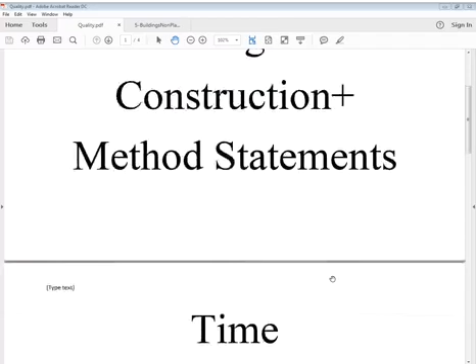25th March 2021, Thursday. Talking to you again regarding professional issues, engineering issues, construction issues, titled civil field engineering, designs, construction, methods, contracts, etc., and quality on top of that, which has very important points to be discussed and taken care of. This includes quality, designs, construction, method statements, time, cost, risks, reliability, analysis, synthesis, thinking, contemplation, application. Very important points to be raised and conferred with, and important issues we have to consider in our approach.

And also buildings which are non-plant buildings, meaning not relevant to blast loading or blast issues, or in chemical areas which are not located in those areas but in administrative areas, storing areas, off-sites - like those non-plant buildings. I talked about this last time, and various statements are included in that.

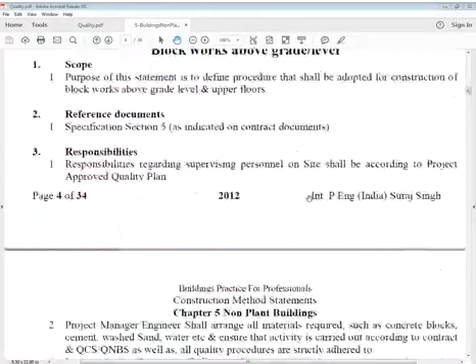Blinding concrete, concrete - we talked about this. Then we talked of reinforcement: cutting, bending, binding, and placing. And we talked of block work above grade level. And then we talked of...

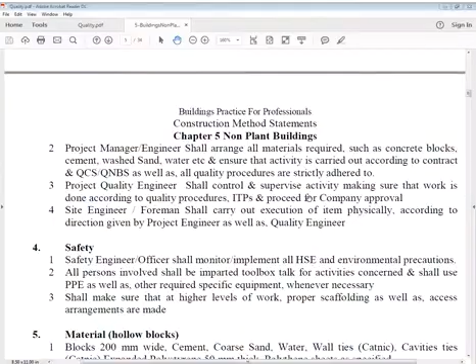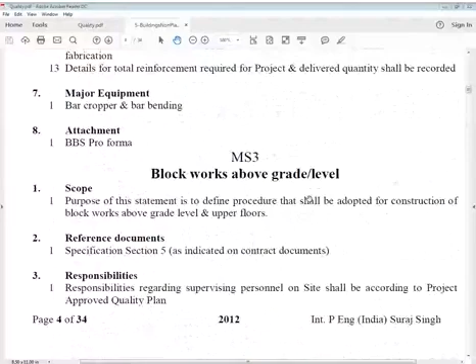Now I'm interested in talking about - let us consider block work first. It's also very important, though it's a very ordinary item, but it's also responsible. We'll take this into our consideration. Let us see this very normal work, which we call very normal, but very, very important work: block works above grade level.

Purpose of this statement is to define the procedure that shall be adopted for construction of block works above ground level and upper floors. What we have to consider - all these points of quality, designs, construction - all that we have to consider in this.

Now, because it is block work, maybe it's not considered structural work. Indeed, it's not structural work if these blocks are not load bearing. Generally blocks are used hollow, and there are certain strengths these blocks have, which we'll discuss. But the objective of this statement is to define the procedure that should be adopted for construction of block works above ground level or grade level and upper floors.

Location is upper floors - that can be ground floor, first floor, second floor, or whatever it is. And the reference document is specification section 5, whatever is in our contract, let us say. It doesn't mean for you it is section 5.

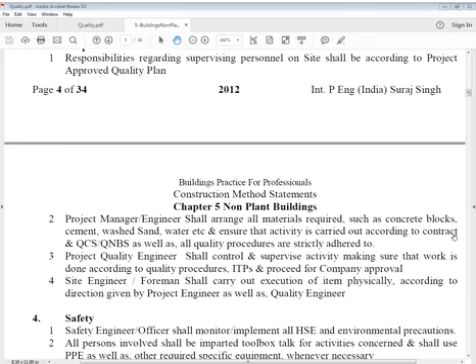Now responsibilities regarding supervision: personnel on site shall work according to the project approved quality plan. Every project must have some quality plan, where responsibilities are defined, job description is defined, accountability is defined, technical accountability, where the project manager or leader or engineer has to arrange all materials required.

Don't just go by what I have written, because I'm just reading superficially and explaining. Project leaders arrange all materials required, such as concrete blocks, cement, washed sand, water, etc., and ensure that activity is carried out according to contract provisions or national standards or national specifications.

Because I use this writing for Qatar, it's given for those times as Qatar National Building Specifications, or QCS, Qatar Construction Specifications. QCS and QNBS is just for the assessment - this sample is not for you specifically.

As well as all quality procedures must be strictly adhered to. Now, project quality personnel or engineer shall control and supervise the activity, making sure that work is done according to quality procedures - ITPs, which means inspection and test plans, and proceed for company approval.

Company means the organization - that is the client or the owner of the project, or whatever company it is for whom we are working. And the site man, site person, site agent or site engineer - who I should say is the site in charge - and delegates, or you may say deputies rather than delegates, shall carry out execution or prosecution of the item physically according to direction given by the project leader and quality engineer.

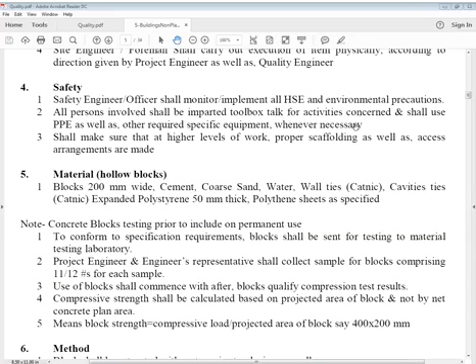When I say blocks, this means hollow blocks, concrete blocks. To conform to specification requirements, blocks shall be sent for testing to a material testing laboratory. How many blocks do you have to send? Generally 11 or 12 is standard, but it's up to you, not less than that. The project representative shall collect a sample of blocks comprising 12 numbers for each sample.

Use of blocks shall commence only after the blocks qualify in compression test results. We will test the block in a compression machine and find the results. The compressive strength has to be calculated based on the projected area of the block, not the net concrete plan area. This is a very important point.

When I'm talking about a hollow block, it is not 100% concreted surface. There are voids, two cavities in each block, which account for about 50%. There's a certain thickness to the walls of the cavity, so you can say there are 5 walls in that block: one in the middle, one on each end, and longitudinally, structure-wise, 2 walls.

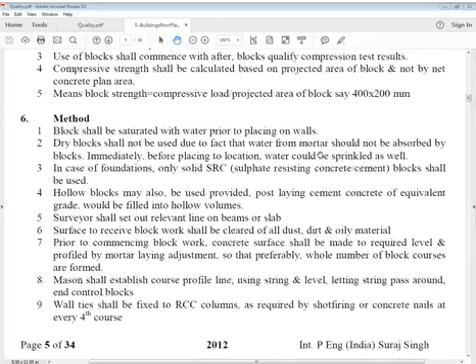Now, what is the method, let us say? I explained so far the fundamentals of block work. Now, what's the method? It's an important point.

Blocks should be saturated with water prior to placing on walls. Dry blocks shall not be used, due to the fact that water from the mortar must not be absorbed by the blocks. Immediately before placing to location, water could be sprinkled as well. Do not use dry blocks. You have to water it, saturate it, so that the block does not absorb water from the mortar. Immediately before placing to location, water should be sprinkled on the block as well as the location.

In case of foundations, only solid SRC (sulfate resisting concrete) cement blocks shall be used. Do not use OPC blocks in foundations. You have to use only SRC and solid blocks, because in foundations solid blocks are used, or you have to fill all cavities either by solid blocks or fill the cavities. In case of solid blocks, there's a handling problem, but in foundations that's used.

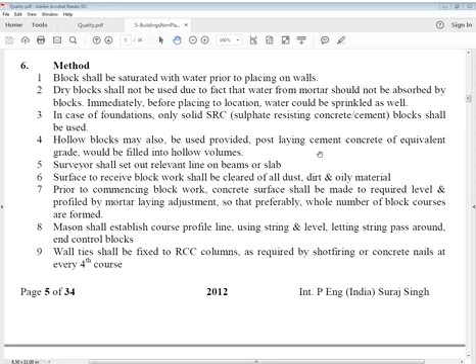The mason, or block layer, shall establish the course profile line. Course means a layer of block. The mason shall establish the course profile line using string and level. String or thread, also called line door.

The level lets the string pass around and control the blocks. The blocks are placed and the string is tied for the purpose of profile construction, letting the string pass around the blocks.

Wall ties shall be fixed to RCC columns as required, by shot firing or concrete nails, at every fourth course. Concrete nails are used in case you don't have a shot firing gun, but the best method is a shot firing gun, which uses steel bullets. So wall ties shall be fixed to RCC columns at every fourth course of block, shot fired using bullets into the concrete walls or column.

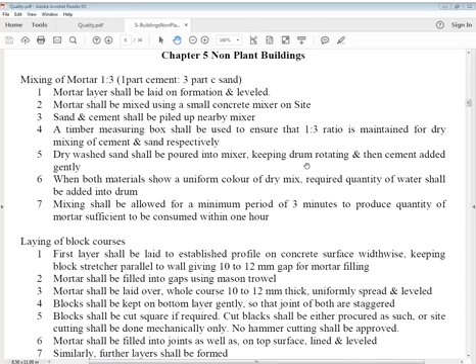Laying of block courses. First layer shall be laid to establish the profile on the concrete surface widthwise. First layer, we are going to use it first on ground floor, keeping the block stretcher parallel to the wall.

Giving a 10 to 12 mm gap for mortar filling. Mortar shall be filled into gaps using a mason trowel, and the whole course of mortar shall be laid over the whole course, meaning no space is left.

10 to 12 mm thick, uniformly spread and leveled. Blocks shall be kept gently on the bottom layer so that joints of both are staggered.

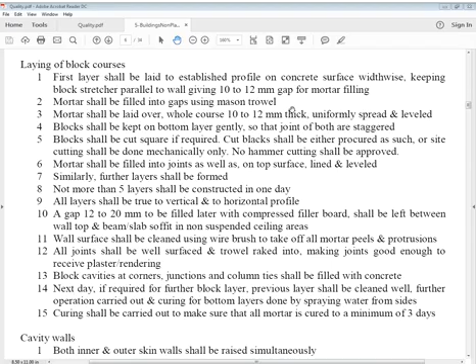Mortar shall be filled into joints as well as on top surface, lined and level. It should be filled completely without leaving any void. Similarly, further layers shall be formed.

Not more than 5 layers shall be constructed in one day, meaning no more than 1 meter, since one layer is 200 mm. Not more than 5 layers to be constructed in one day.

All layers to be true to vertical and horizontal profile. All layers shall be truly horizontal and truly vertical, within tolerances of course.

A gap of 12 to 20 mm, to be filled later with compressed filler board, shall be left between the wall top and the beam soffit or slab soffit in non-suspended ceiling areas. Your block should not touch the surface of the RCC at top. The top of the wall should be free of touch from the concrete beam soffit or slab soffit, and that portion should be filled with compressed filler.

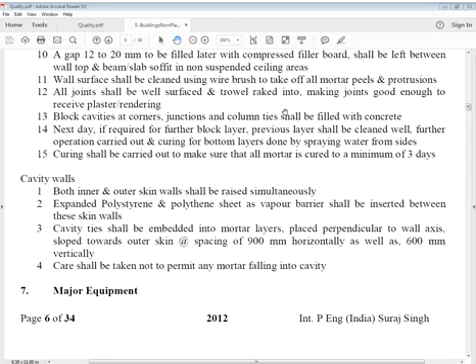Now let's talk about cavity walls.

Cavity walls: both inner and outer skin walls shall be raised simultaneously. Not that you raise the external half and internal quarter, or full half. No, not like that, because we have to fill in cavity ties. Both inner and outer skin walls shall be raised simultaneously.

Expanded polystyrene and polythene sheet as vapor barrier shall be inserted between these skin walls.

Cavity ties shall be embedded into mortar layers, placed perpendicular to the wall axis, sloped towards the outer skin, at a spacing of 900mm horizontally as well as 600mm vertically. So every third layer has cavity ties, and the distance between them is 900mm, you can say 2.5 blocks.

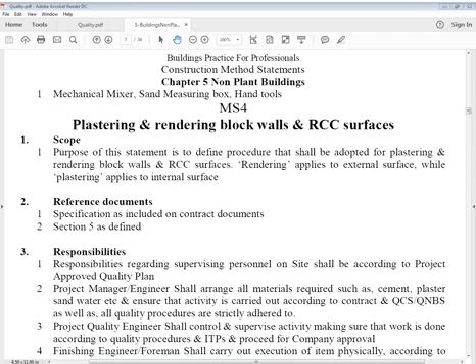This was about concrete block, and we have to understand that we talked of quality here - quality of material, quality of safety, quality of course - safety has not been discussed in this but we'll discuss it, and testing. We discussed reliability, and quality is mainly what's discussed in this case.

So what we discuss is, we have to understand that. Then we can say safety is also given here. I think we covered safety - yes, this was discussed about HSE ergonomics, so we discussed that one.

Only point I have to discuss, which we missed, is that the wall is not done on one floor only - you just keep certain drums, reversed, and put on them some timber planks, so people stand on them and work at not more than 2 meters height, because generally the room is around 3 meters high. So we keep this 1.5 meters high, and the person is also about 1.5 meters high, so generally it reaches the top. In case scaffolding is required, mason's scaffolding or steel pipe scaffolding can be installed there.

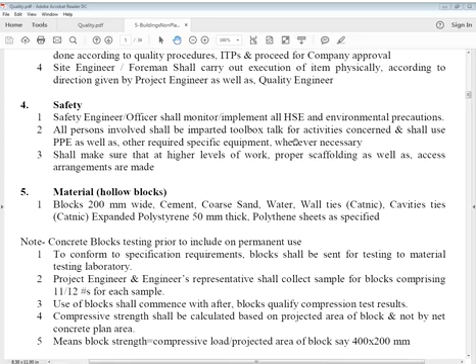I think this doesn't carry much risk - even if a person falls from 1 meter height, it's not going to be fatal, and this is ordinary safety you can say. Since you work within the room, heat is not an issue, though wind could be an issue if this is not done. Then hygiene and housekeeping are important issues, so those must be taken care of. And mortar should not go into eyes, so you may use safety glasses, and of course other PPE are there.

Now we talk of plastering and rendering block walls and RCC surfaces - plastering and rendering.

You may ask, what is plastering and what is rendering? What's the difference? Everybody has a right to ask. Plastering is a general term which is used, applied to internal plaster - simple. And when plaster is exposed to external agencies like weather, sun, rain, that's called rendering.

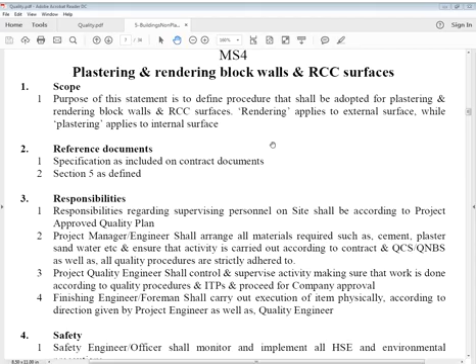Documents are specifications and contract documents, and we know that. Now, responsibilities, as we said before, regarding supervising personnel on site shall be according to the project approved quality plan, which every site must get. If not, then you define yourself who's responsible for what.

Project leaders shall arrange all material required, such as cement, plaster, sand, water, etc., and ensure the activity is carried out according to contract and national as well as other applicable specifications. All quality procedures must be strictly adhered to - quality is important here. Project quality in charge shall control and supervise the activity, making sure work is done according to quality procedures and inspection and test plans, and proceed for company approval.

Finishing engineer, foreman - I'm using the specific term finishing items because the structural engineer is not here. Finishing engineers, or a person experienced in finishing items, would carry out execution of item physically according to direction given by project leader as well as quality leaders.

Now safety. Safety engineer or safety in-charge monitors and implements all HSE - health, safety, environment, ergonomics - precautions. All persons and crew involved shall be imparted toolbox talks for activities concerned and use personal protective equipment as well as other required specific equipment whenever necessary.

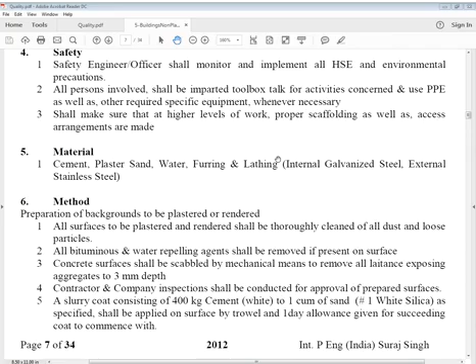but I think here we don't do it. Well, I won't say it can't be done - it should be done in the interest of the job. Then, what's the method now? Method.

Preparation of backgrounds to be plastered or rendered. All surfaces to be plastered or rendered must be thoroughly cleaned of all dust and loose particles, probably using a hardware brush.

All bituminous and water repelling agents - any coal tar, bituminous, or water repelling agents - should be removed if present on the surface. Okay, this is very much clear.

So concrete surfaces would be scabbled. Concrete surfaces means RCC surfaces - columns, beams, or walls, whatever is concrete - must be scabbled or hackled. Concrete surfaces shall be scabbled by mechanical means, not by hammer.

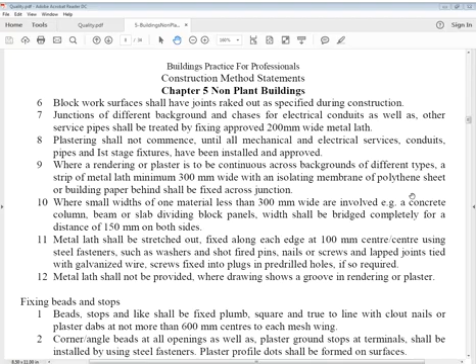And here it's not done like that, here people do differently. Now, block work surfaces shall have joints raked out as specified during construction.

Junctions of different background and chases for electrical conduits as well as other service pipes be treated by fixing approved 200 mm wide metal lath, as I discussed already.

Plastering shall not commence until all mechanical and electrical services, conduits, pipes and first stage fixtures have been installed and approved. First stage fixtures, we have boxes, not switch panels, electrical boxes have been installed, wire conduits have been installed, and whatever connections and fittings have all been installed and approved.

Where rendering or plaster is to be continuous across backgrounds of different types, a strip of metal lath, minimum 300 mm wide, with an isolating membrane of polythene sheet or building paper located behind, shall be fixed across the junction, for example across an ancillary surface and blockwork or some other material.

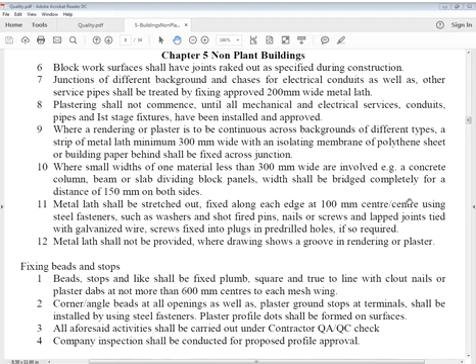Where small widths of one material less than 300 mm wide are involved, namely a concrete column, beam or slab dividing block panels, then the width shall be bridged completely for a distance of 150 mm on both sides. Metal lath shall be stretched out,

fixed along each edge at 100 mm centers using steel fasteners such as washers and shot fired pins, nails or screws, and lap joints tied with galvanized wire. Screws fixed into plugs in pre-drilled holes if so required.

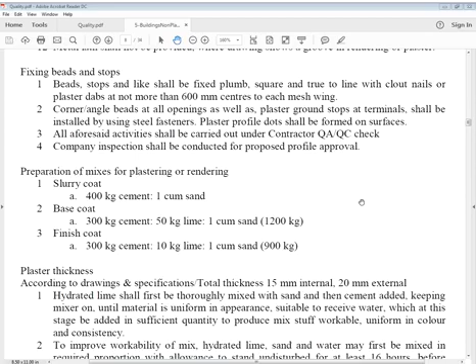We have here slurry coat as defined, which is spread by a rotating mix machine, a rotating spreader machine, not directly as we do here. There's a standard way that slurry coat is to be sprinkled on surfaces, and there's equipment which rotates and automatically spreads that sprinkling coat.

Slurry coat: 400 kg cement, 1 cubic meter sand. Then base coat, that's 300 kg cement. We increase the quantity of cement in other coats. Slurry coat is a little lean, less cement. More cement, and in this case less cement, 300 kg cement.

Base coat with 50 kg lime, 300 kg cement, about 1/6 of lime, 50 kg lime, so total is 350 kg, and 1 cubic meter sand, so block cement 1200 kg. Finished coat, that is 300 kg cement, 10 kg lime, 1 cubic meter sand, 900 kg.

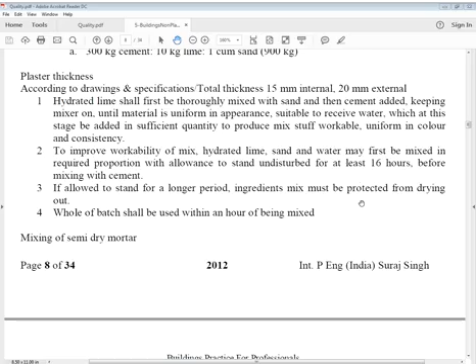To improve workability of the mix, hydrated lime, sand, and water may first be mixed in the required proportion with allowance to stand undisturbed for at least 16 hours before mixing with cement. This is a very important point. If allowed to stand for a longer period, the ingredients mix must be protected from drying out. The whole batch must be used within an hour of being mixed.

Mixing of semi-dry mortar. Now that was wet mortar, let's talk of semi-dry mortar. The mortar layer shall be laid on formation and leveled. Mortar shall be mixed using a small concrete mixer on site. Sand, lime, and cement shall be piled up nearby. A timber measuring box is used to ensure that the required ratio is maintained for the dry mix of cement and sand respectively.

Dry washed sand is poured into the mixer, keeping the drum rotating, and then cement added gently, followed by hydrated lime. When the added materials show a uniform color of dry mix, the required quantity of water shall be added into the drum to produce semi-dry mortar. Mixing shall be allowed for a minimum period of 3 minutes to produce a quantity of mortar sufficient to be consumed within 1 hour.

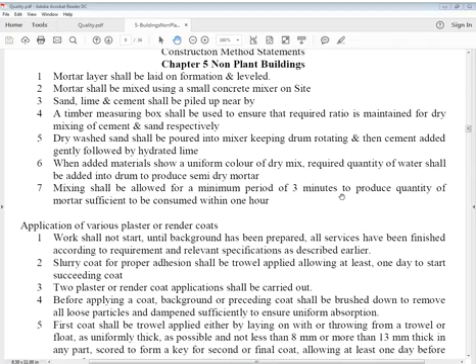So this is mixing. I repeat: mortar shall be mixed using a small concrete mixer; sand, lime and cement shall be piled up and then measured. After that, dry washed sand is poured into the mixer, keeping the drum rotating, cement added gently, followed by hydrated lime. The mix is kept rotating until it shows uniform color of dry mix. Required quantity of water is added into the drum to produce semi-dry mortar. Mixing shall be allowed for a minimum period of 3 minutes to produce quantity of mortar sufficient to be consumed within 1 hour.

Application of various plaster or render coats. Work shall not start until the background has been prepared, which we talked of before, and all services have been finished according to requirement and relevant specifications as described earlier.

Slurry coat for proper adhesion shall be trowel applied, meaning adhesion between the surface to be plastered and this material, allowing at least 1 day before starting the succeeding coat. It can be trowel applied or machine applied; you can apply it either way.

Two plaster or render coat applications shall be carried out.

Before applying a coat, the background or preceding coat shall be brushed down to remove all loose materials and particles, and dampened sufficiently to ensure uniform absorption. The first coat shall be trowel applied, either by laying on with or throwing from a trowel or float.

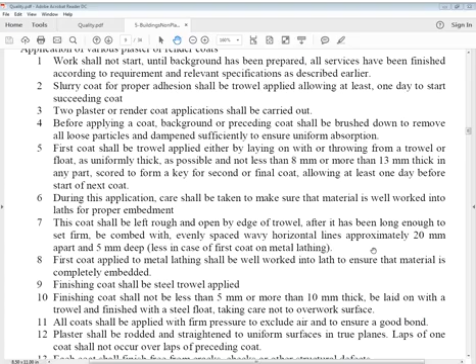During this application, care must be taken to make sure that material is well worked into laths for proper embedment. Do not leave mortar there; it should be completely applied so that laths are embedded completely. This coat shall be left rough and open by edge of trowel.

After it has been long enough to set firm, it should be combed with evenly spaced wavy horizontal lines, approximately 20 mm apart and 5 mm deep, less in case of the first coat on metal lathing.

First coat applied to metal lathing shall be well worked into the lath to ensure that material is completely embedded. Finishing coat shall be steel trowel applied, not less than 5 mm or more than 10 mm thick. It shall be laid on with a trowel and finished with a steel float, taking care not to overwork the surface.

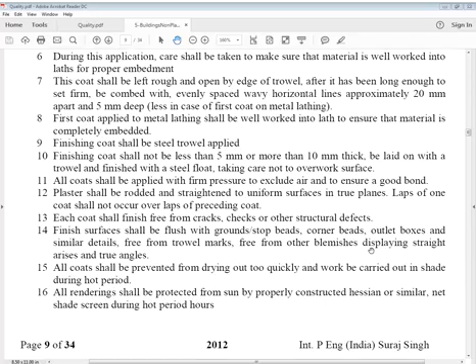Laps of one coat shall not occur over the laps of the preceding coat, meaning the laps of coats should not be at the same point. Each coat shall finish free from cracks, checks or other structural defects. Finished surfaces shall be flush with grounds, stop beads.

Finished surfaces shall be flush with ground or stop beads, corner beads, outlet boxes, and similar details, free from trowel marks, free from other blemishes, displaying straight arises and true angles.

All coats shall be prevented from drying out too quickly, and work is to be carried out in shade during hot periods. All renderings shall be protected from sun by a properly constructed Hessian or similar net shade screen during hot period hours.

Each coat shall be kept damp by means of a fog spray of water for a minimum of 3 days to allow before a subsequent coat is applied, or in case of a finished coat, before protective screens are removed. Surface of the finished coat shall be smooth, true, and free from waviness, irregularities or blemishes, with straight, level or plumb angles. External angles shall be pencil rounded.

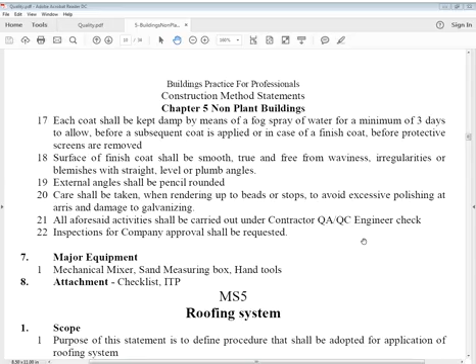Inspections for company approval shall be requested, and we can use equipment like mechanical mixer, sand measuring box, hand tools, and attachments as checklist. So you can say that this is very important.

If I go for 5 minutes and come back, as usual, just a minute please, you can read this meanwhile. It's a very important point, everybody should read this. It's no joke, it's plaster, but in big quantity, and it's a protective layer. If it doesn't work fine, how can it protect other layers? That's one thing you must understand. Sorry gentlemen, just read it for yourself, it is for 5-10 minutes, I'll be back.

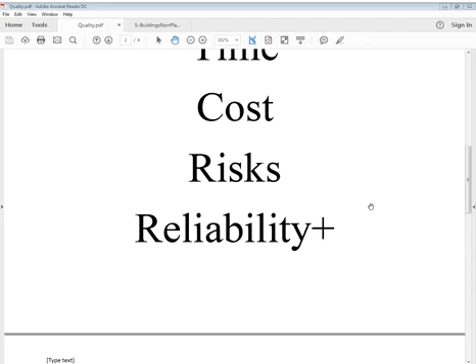Now I'm just going to roofing system. Before that, we'd like to talk of this quality. We talked a lot about block work, about plastering and rendering, about preparation of surfaces of plaster, rendering, about expanded metal fixing, galvanized or stainless steel. We talked of slurry coat, base coat, finishing coat. We talked of thicknesses, 12 to 15 and 20, and these are specifications, requirements, and mixing of quality, laying quality, and what design says, what ratio says, and this all construction, and whatever were given were methods of those construction, and safety issues related to that. Now we go to another item that's also very significant one, and that is roofing system.

Roofing is, of course, very good, reliable work, which we can say protects your roof slab from water penetration, insulating heat, and also thermal transmission, and proper drainage of rainwater allowance, you can say, and if it is accessible...

Users can go to roofing, and also if roof is not accessible, in that case only maintenance crew look after services of machines kept on roof, like chillers, air handling units for air conditioning, HVAC, or electrical, or some copper chillers, pipes, or these days also solar panel installations, water tank installations, and whatever else is required, this roof is used for - all are considered.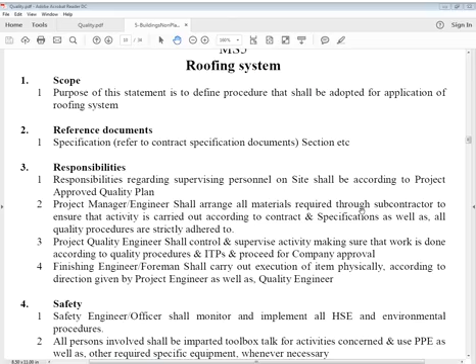Specifications are available, it's your specifications. I don't want to talk on that, because what I'm going to do is very standard specification, and it's generally used at international level.

Responsibilities, as usual, quality plan you have to refer to find who is responsible for what job description for someone. Then project leaders have to arrange required materials directly or through subcontractors, and this activity can be carried out through vendors, or you can do yourself. But issue is warranty of roofing system.

And specifications are to be complied with, which are given - you can say they are standard specs. Quality procedures are available, or you can define them. So project leader arranges all materials required through subcontractor to ensure that activity is carried out according to contract and contract specifications, as well as all quality procedures are strictly adhered to.

Project quality responsible lead shall control and supervise activity, making sure that work is done according to quality procedures and ITPs, that stands for inspection and test plans, and proceed for company approval. Finishing engineer or finishing in charge shall carry out execution of item physically, shall supervise physically according to direction given by project leaders and quality leaders.

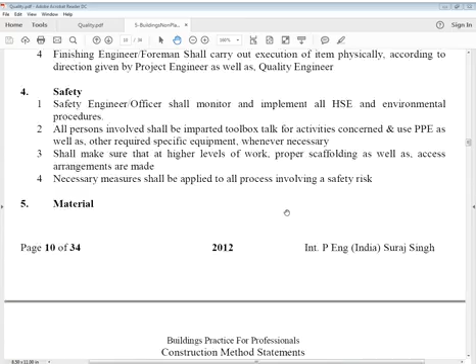So this is actually on roof, and parapet must be ready, there should be no chances to fall, and it can't be without that. So if there is no parapet, or it's not very high, in that case you have to take care people should not fall from a small parapet. If parapet is 1 meter or more, it's okay, fine. And if it's not, if it's some small 1 or 2 layer or 20-30 centimeter beam, in that case we must take care that all activities on roof must be safe, people should not fall.

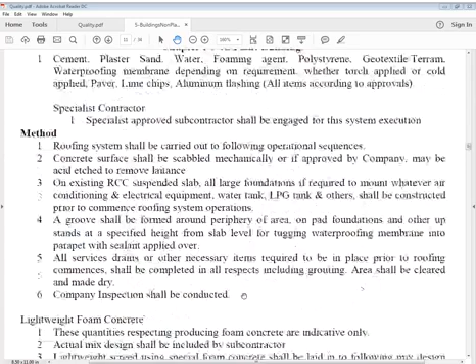Now, cement - what says cement material is cement, we can say this is material chapter. Materials are cement, plaster, sand, water, foaming agent, polystyrene, geotextile, terram, waterproofing membrane depending on requirement - whether torch applied or cold applied - paver, lime chips, aluminum flashing, all items according to approvals and according to drawings. And also agency, applicator, you can say applicator, we call it specialist contractor, applicator or vendor - specialist approved subcontractor to be engaged for this system application.

What's the method? Roofing system shall be carried out to the following operational sequences. Concrete surface shall be scabbled mechanically, that is roof concrete slab surface, or if approved by organization, company may be acid etched to remove laitance. Generally acid etching is avoided and scabbling is okay.

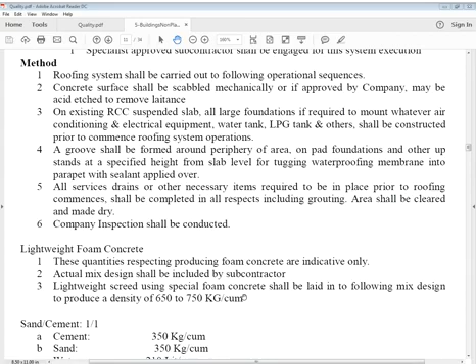All services, drains, drainage, or other necessary items required to be in place prior to roofing commences shall be completed in all respects, including grouting. The area shall be cleared and made dry, meaning everything must be completely done, nothing left, before starting roofing. Then there's a company inspection, a formal inspection.

Now we talk of lightweight foam concrete. The area is ready - scabbled, cleaned, cleared, everything done. All plinths laid, everything done, you can say. These quantities for producing foam concrete are indicative only.

The actual mix design shall be decided by the subcontractor applicator. Lightweight screed using special foam concrete shall be laid to a mix design producing a density of 650 to 750 kilogram per cubic meter. The ratio is approximate, not necessarily to be followed exactly - it depends on the science you design it with. Sand and cement ratio is 1:1.

Then water - 210 liters per cubic meter, which means if you take only the cement, 350 kilograms, this works out to about 60%. So 60% is the water cement ratio here - 0.6 water cement ratio in this case.

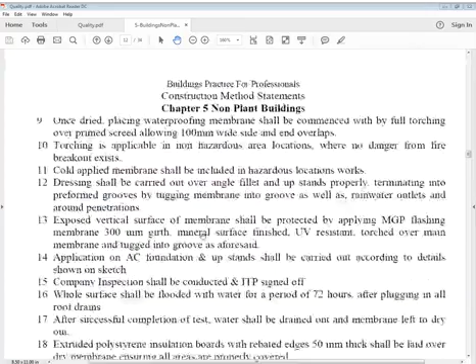Once dried, placing of the waterproofing membrane shall be commenced by full torching over the primed screed, allowing 100 mm wide side and end overlaps.

Torching is applicable in non-hazardous areas, locations where there is no danger of fire breaking out. Cold applied membrane shall be used in hazardous locations works.

Dressing shall be carried out over the angle fillet and upstands, properly terminating into preformed grooves by tucking the membrane into the grooves.

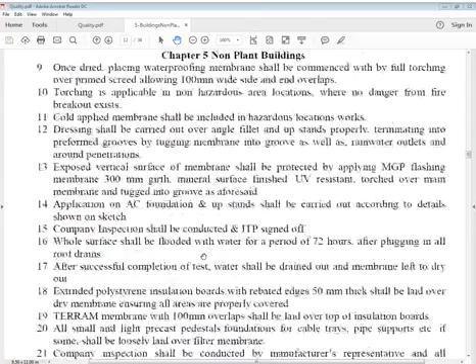Important point. Just 5 minutes, please, better for you, for me, for everybody. I give you a chance also. This is an important one because we should know everything clearly.

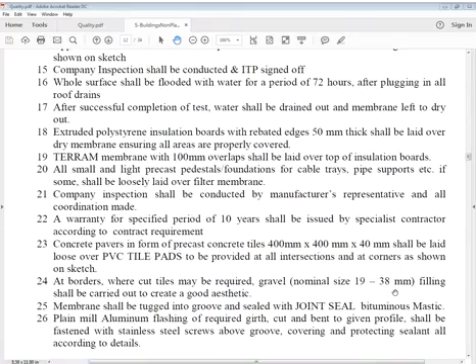Whole surface, I'm reading point number 16. Whole surface shall be flooded with water for a period of 72 hours after plugging in all roof drains. After successful completion of test, water shall be drained out and membrane left to dry.

But what is test? That is important: 72 hours, it's flooding. You put maybe 20 or 30 mm, a little more layer of water. Of course that can't be uniform because it's a sloping surface, so minimum 30 to 40 mm at the highest point, and we flood and wait for 72 hours because we have blocked all outlets. We have to make sure there's no leakage seen from ceilings, from soffits.

That's the point here, because if the surface has leaked, this membrane has leaked, if there's some error in the membrane, that can be inspected. If there is no leakage of water observed from below, and no damage seen to the waterproofing membrane, then we can say okay, fine, you can drain out this water. After successful completion of the water tightness test, water shall be drained out and roofing membrane left to dry out.

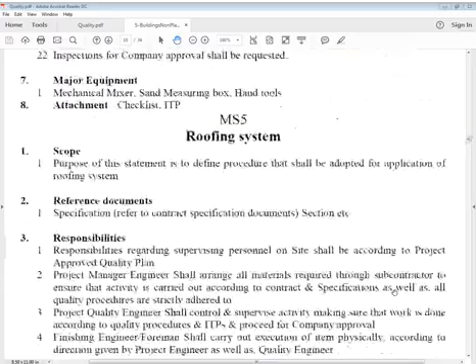This is roofing, I had a sketch, but at this moment I don't know where it is. Very simple, you can say, it's no need of sketch actually, just see.

Slab is there, scabble slab number 1, scabble it or hackle it clear now, and then put on that a profile of slope where disposal rainwater outlet is there. You keep minimum 50 thick and keep on the highest ones, just give 1.25% slope to 1.5% slope, and in that profile you can concrete, that is lightweight concrete or foam concrete.

Method is given here: a foaming agent will mix into that. That's laid one, and immediately foam concrete is laid on that, let 2 layers and dry it out.

Then angle fillet of 50-50 triangle cross section shall be formed also at all directional changes. Cement sand angle fillet, meaning complete screed shall be cured with fresh water for 2 days, and cement sand angle fillet be given 50 by 50 all around.

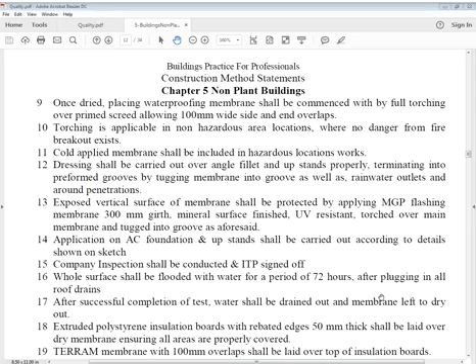The exposed vertical surfaces of membrane shall be protected by applying flashing. You can use ultraviolet resistant flashing, torched over main membrane, and then foundation of stands of AC carried out accordingly.

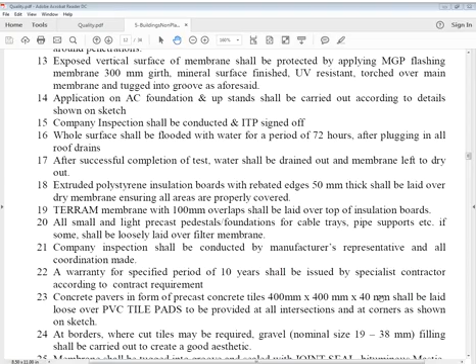Inspection done and the whole surface shall be flooded, then water test done. After completion of test, water shall be drained out. Then polystyrene capped on 50 mm heavy duty extruded polystyrene, and membrane of terram or similar on there. Then I put precast pedestals, foundation, etc. for all small items, and 10 years warranty issued.

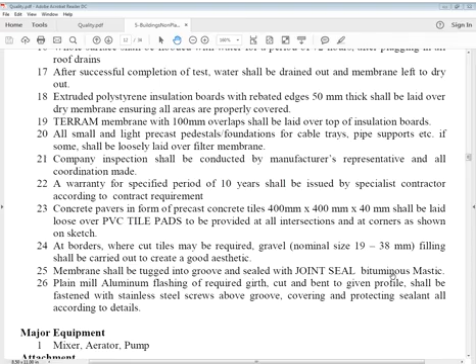We have to provide tile pads on and tiles 400 by 400, 40 or 50, and then that's done. Whatever surrounding areas can be gravelled in. That's behind that, to understand that point. So what we call it, something interesting here.

In this case, when we say quality relation, it means material quality, workmanship quality, mixing quality, performance quality, specification, of course must be quality. Then we have to design, meaning 1.5% slope or 1.25% slope, or what, depending on roof diagonal distance. Sometimes it may be more, so we can reduce that slope. For example, if it's 20 meters path flow, in that case we may take it as 1% only, because 20 meters gives 20 centimeters, 200 mm.

So just to reduce material as well as let it function properly, overslope is also no good. So design part is there, then construction, scabbling of surface, cleaning, providing slopes and profile, then doing the concrete itself—mixing of concrete is a quality issue, and how to do all that for reliability over time. There should be a reliable roof, meaning I cannot say once laid waterproof it leaks after 1 or 2 months. That's why there's a first 10 years warranty in this case. And then thinking about this application, we have to be very clear on this point.

Now it's ceramic tiles, ceramic floor tiles. Purpose of this statement is to define the procedure that shall be adopted for laying ceramic floor tiles on RCC floor surfaces.

Specifications, whatever it is, and responsibilities are the same, meaning no difference. A finishing engineer is a must, all project leaders or quality leaders have to do their job, they themselves have to arrange materials and everything. So a contractor must be there, of course, for quality work. If people don't know, otherwise you can do it yourself. It's after all a finishing item, and close care must be taken.

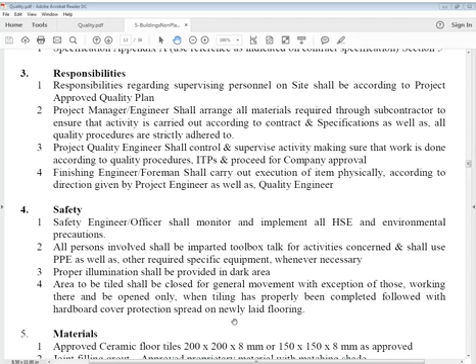So responsibilities regarding supervising personnel on site shall be according to the project quality plan, and project leaders shall arrange for materials and vendors, or applicators or tilers, and all that is given in specifications will be done accordingly. Quality people, quality in charge will look after all this, quality control, and then sign off, and of course the finishing engineer is required because it's a finishing item.

Same thing for safety in this case. It's grinder safety required, you can say, because sometimes you cut tiles as well. You have to take care of HSE, meaning safety shoes, overalls, safety glasses and helmets. Illumination is very important—people shouldn't work in dark. Generally tiling is done internally, and in cloudy weather it's dark, can't see visibly inside, so there must be lighting provided.

Safety activities, toolbox talks—everybody knows you have to find out which toolbox talk is best suited for this. Then illumination and lighting must be there, and general movement especially of those working there, and tiling has probably been completed, followed by hardboard cover for protection. Protection, yes, cover for protection is also important. Our material is ceramic tiles, as approved joint filling grout, proprietary material matching shades.

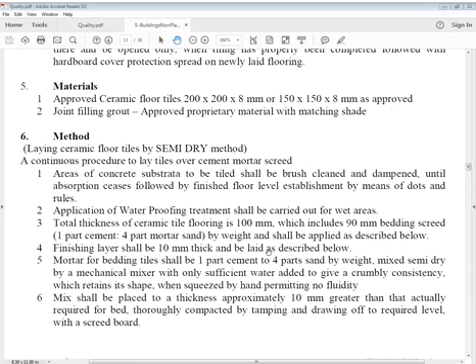Now let's see the method. The method is a long one, we'll go through it momentarily, one by one. You read it first yourself, I think that's better. If you can read this, we'll talk about it in 5 minutes. Read this yourself.

So, laying ceramic tiles by semi-dry method.

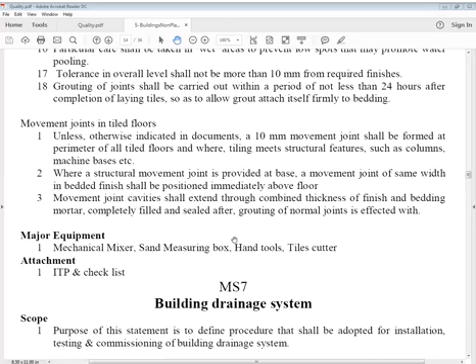Movement joint cavities shall extend through the combined thickness of finish and bedding mortar, completely filled with sealant after grouting of normal joints. We require a mechanical mixer for mixing mortar, a sand measuring box, hand tools, tile cutters, etc.

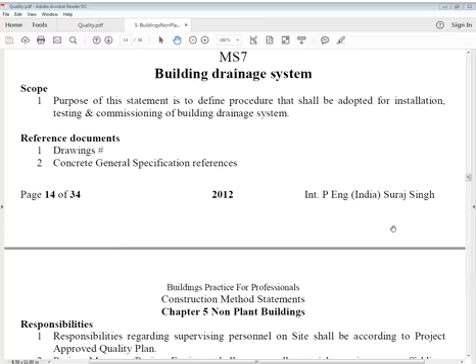Building drainage system. That's the length of this. What's that one? It's not very big.

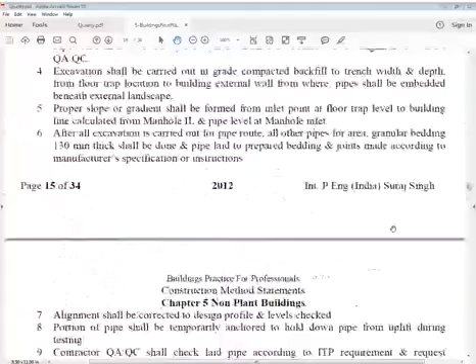See, there is no sequence on this method. It's just whatever I had to put in that. So don't think of sequence, there's no sequence at all. Whatever item I have, I'll just try to talk about and give that one. So sequence is not a question here.

It's building drainage system. Building drainage system, what's that? Purpose of this statement is to define the procedure that shall be adopted for installing, testing and commissioning of building drainage system.

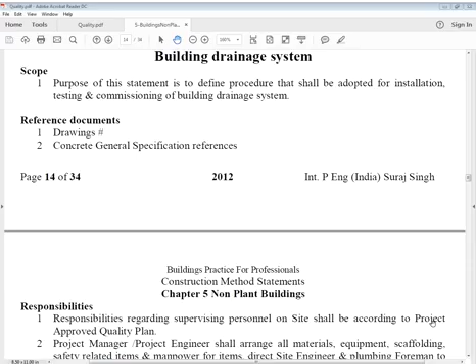Specifications and drawings, leave that aside. Responsibilities also you can say almost same except survey. So let's say responsibilities regarding supervising personnel according to project approved plan, quality plan, project manager and leaders, all that.

They have to arrange all materials, equipment, scaffolding, safety related items, manpower items, direct site engineer, set up plumbing foreman to resort appropriate action for smooth running of items, and all materials for disciplinary works shall be arranged by them. All working shop drawings shall be prepared and completed. So all permanent materials pertaining to this discipline shall be submitted for approval, and site engineer, project engineer permit

for all set out lines. The direct surveyors, what to do, site managers, site engineers, project engineers, plumbing foreman, and coordinator shall direct surveyor for setting out lines and levels in conjunction with project manager, project engineer.

So surveyor shall be responsible to set out drainage lines and establish bedding levels or invert levels. Bedding level or invert level - surveyor shall be responsible to set out that.

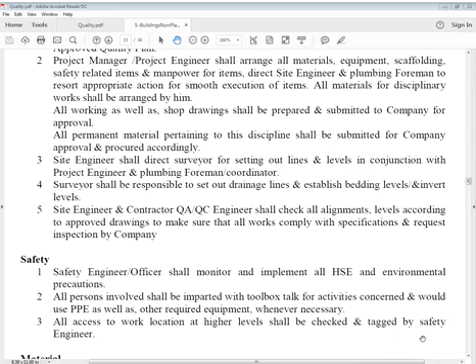Site people, contractors, site engineer, QC, QA, they shall check all alignments, level according to approved drawings to make sure that all works comply with specification and request inspection.

Safety, as usual, nothing specific in this. So let's go further.

Materials also - pipes you need, fittings you need, bedding materials you need. Now, what's the method?

Prior to commencement of drainage works, at time of below grade slab backfill necessary. Before doing grade slab, there may be many items, many locations where pipe is required. So PVC sleeves shall be inserted into RCC beams or block walls, depending on dictated by pipe level at building line.

Backfill shall be carried out in layers and compacted, all according to agreed procedures given elsewhere. Pipe route shall be set out by surveyor and checked by engineers and quality people. Excavation be carried out in grade, compacted backfill.

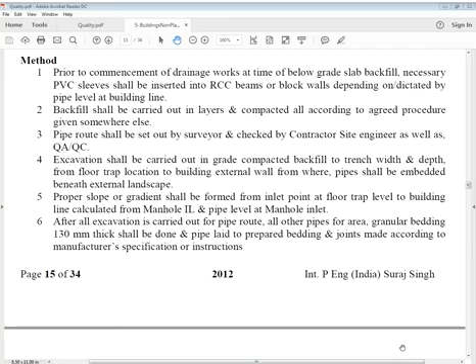From floor trap location to building external wall, from where pipes shall be embedded beneath external landscape. Proper slope or gradient shall be formed from inlet point at floor trap level to building line, calculated from manhole invert level and pipe level at manhole inlet.

You know what's manhole invert level, right? After all excavation is carried out for pipe route, all other pipes for area with granular bedding - that is granular bedding 130 mm thick - shall be done, and pipe laid to prepared bedding, and joints made according to manufacturer's specifications or instructions.

Alignment shall be corrected to design profile and levels checked. Portion of pipe shall be temporarily anchored to hold down pipe from uplifting during testing. So anchorage shall be provided temporarily to hold the pipe.

Of course, inspections to laid pipe shall be conducted according to ITP requirement. Water or air test as practical shall be conducted according to specifications and approval granted.

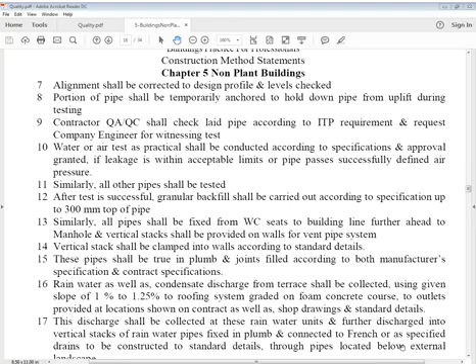Alright, let's say alignment shall be corrected to design profile, levels checked, portion of pipe shall be temporarily anchored, contractor inspection shall be made, water air test shall be conducted according to specifications and approval granted, and if leakage is within acceptable limits the pipe passes successfully under the defined air pressure.

Similarly, all other pipes shall be tested. After test is successful, granular backfill shall be carried out according to specifications, up to 300 mm on top of the pipe.

Up to 300 mm top of pipe. Similarly, all pipes shall be fixed from WC seats to building line, further ahead to manhole, and vertical stacks shall be provided on walls for vent pipe system. Vertical stack shall be clamped into walls according to standard details. These pipes shall be true in plumb.

Joints filled according to both manufacturer's specifications and contract specifications. Rainwater as well as condensate discharge from terrace shall be collected using given slope of 1% to 1.25%, to roofing system graded on foam concrete course, to outlets provided at locations shown on contract as well as shop drawings and standard details.

This discharge shall be collected at these rainwater units and further discharged into vertical stacks of rainwater pipes fixed in plumb and connected to French or as specified drains.

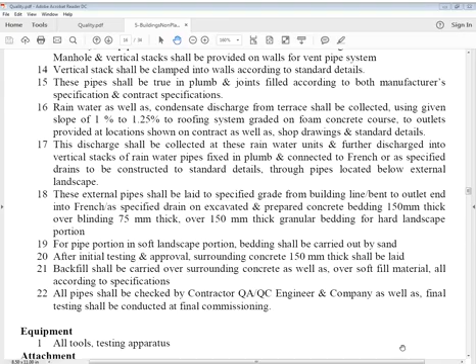These external pipes shall be laid to specified grade. This discharge shall be collected at these rainwater units and further discharged into vertical stacks of rainwater pipes fixed in plumb and connected to French or as specified drains, to be constructed to standard details through pipes located below external landscape. These external pipes shall be laid to specified grade from building line bend to outlet end into French or as specified drains, on excavated and prepared concrete bedding 150 mm thick, or blinding 75 mm thick, over 150 mm thick granular bedding.

So what it says: these external pipes shall be laid to specified grade and bend, from building line to outlet in French or as specified drains, on excavated and prepared concrete bedding 150 mm thick, or blinding 75 mm thick, then over 150 mm thick granular bedding. For hard landscape portion and for pipe portion in soft landscape portion, bedding shall be carried out by sand after initial testing and approval, with surrounding concrete 150 mm.

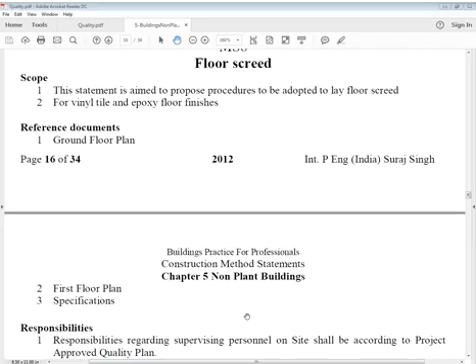Floor screed: this statement is aimed to propose a procedure to be adopted to lay floor screed for vinyl tile and epoxy floor finishes, per ground floor plan, first floor plan specifications. Responsibilities are same, there's nothing specific in this as well. Safety, toolbox talks, operation concerns, supervision, and materials: cement, wash sand, bonding agents, water.

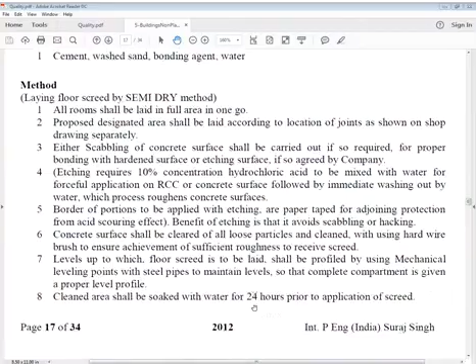Let's see, I think it's not very long. Let us see how it works now. It works. Cement, wash sand, bonding agent, water. Laying floor screed by semi-dry method. Semi-dry method.

All rooms shall be laid in full area in one go. Proposed designated areas shall be laid according to location of joints as shown on shop drawings.

Either scabbling of concrete surface shall be carried out, if so required, for proper bonding with hardened surface, or etching surface if so agreed by client or company. So scabbling could be done, or you can say etching. Do you know what etching is? Maybe many of you don't know.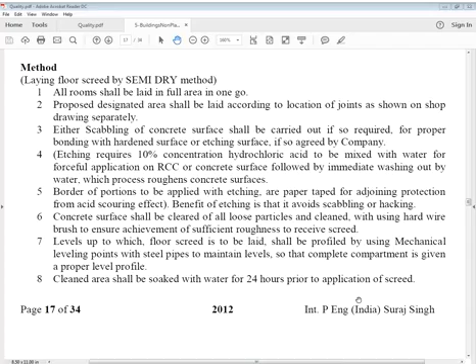10% hydrochloric acid is added into water; etching requires 10% concentration hydrochloric acid mixed with water for forceful application on RCC or concrete surface, followed by immediate washing out by water, which process roughens the concrete surface. You use it under force by mixing with water, leave it on concrete, then wash away immediately. After that, you'll find a roughened surface with laitance removed.

Border portion to be applied with etching, or paper taped - border should be taped for joining protection from acid scouring effect. Benefit of etching is that it avoids scabbling or hacking. Concrete surface be cleared of all loose particles and cleaned using a hard wire brush to ensure achievement of sufficient roughness to receive screed.

Level up to which floor screeds will be laid shall be profiled by using mechanical leveling points with steel pipes, to maintain levels, so a complete compartment is given a proper leveling profile.

Cleaned area shall be soaked with water for 24 hours prior to application of screed. Contractor's inspection shall be conducted for examination pertaining to preparatory works for ready-to-pour compartment. Application.

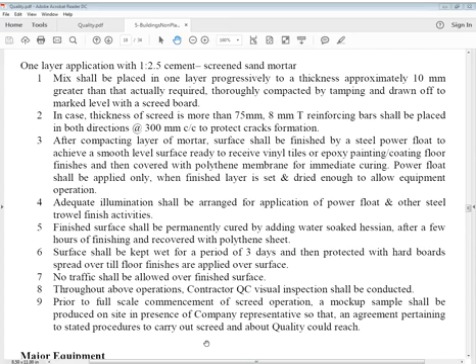Adequate illumination shall be arranged for application of power float and other steel trowel finishing activities. The finished surface shall be permanently cured by adding water-soaked Hessian after a few hours of finishing and recovering with a polythene sheet.

Surface shall be kept wet for a period of 3 days and then protected with hardboard, spread over till floor finishes are applied over the surface, that is, vinyl floor or epoxy floor finishes.

Throughout the above operations, Contractor QC inspections will be conducted. Prior to full-scale commencement of screed operation, a mock-up sample shall be produced on site in the presence of Company representative, with agreement on procedures to carry out the screed work for quality control. We require a mechanical mixer, wheelbarrows, masons' tools, and power float, like that.

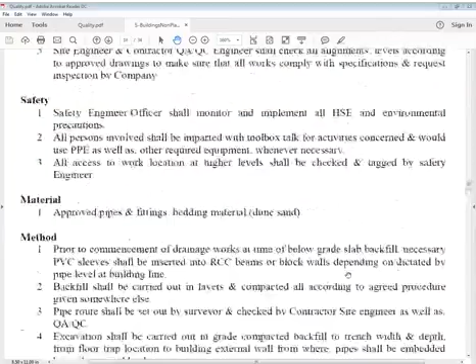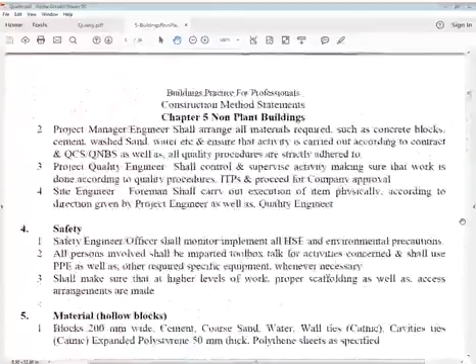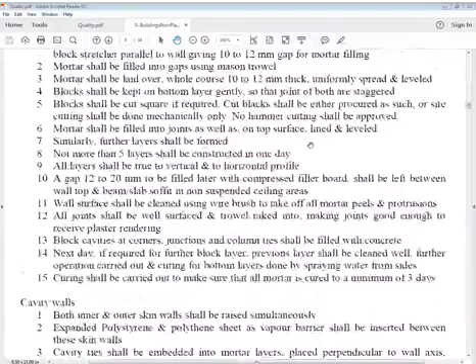That's what we have studied today. Let's just go through what we have studied. We started with block work, I am sure. We went through block work, understanding what block work is, its strength, cavity ties, other ties, tests of blocks, and then the methods, trying to learn what block work is and how it's done.

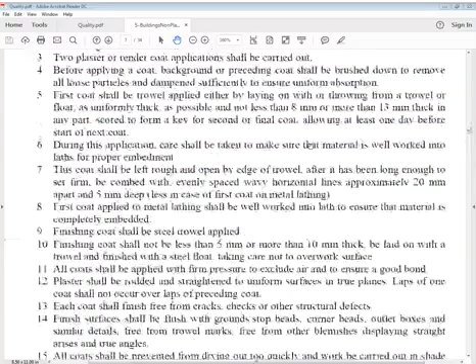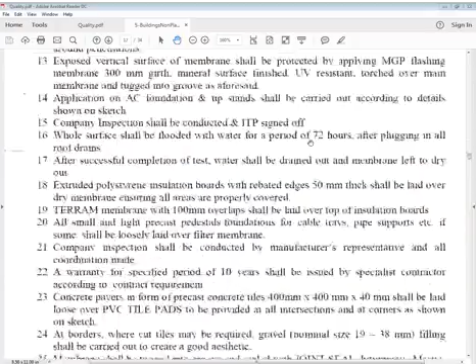And then we did laying ceramic floor tiles, the building drainage system, and then of course we just studied floor screed.

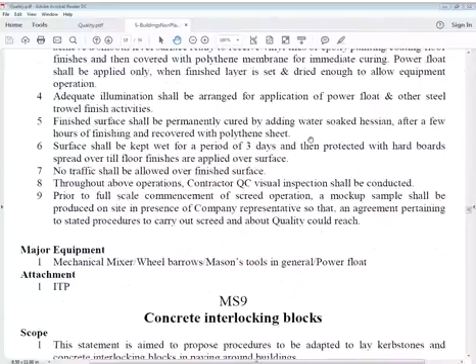This is like concrete blocks, we will take concrete blocks later, and road blocks for driveways. Like that we'll take care of this, alright, then we'll put it like this.

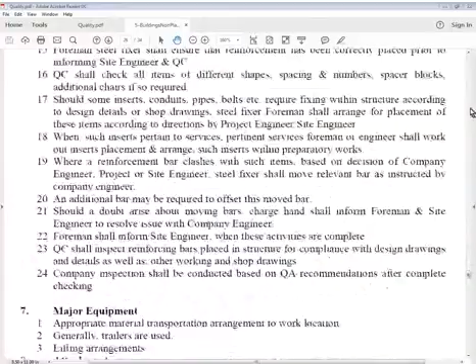Okay, now you can say quality design, construction, method statements, etc. We can say that's an important one, of course, the important one. Just a minute, you can read this one, there's this one.

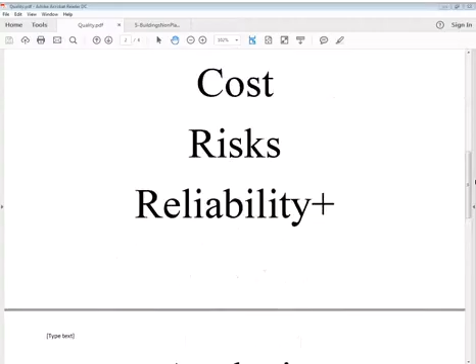So I think it's time now that people must understand what is quality, what is analysis, what is synthesis, what is thinking, what is contemplation. It's time for that. We should have an application mind. Application mind is very important, which means contemplation mind and thinking mind and synthesis mind, analysis mind, reliability mind, risk mind, cost mind, time mind, method statements, construction, design, quality. All this, we must rely on this. Otherwise we do little, you can say. All these statements supporting.